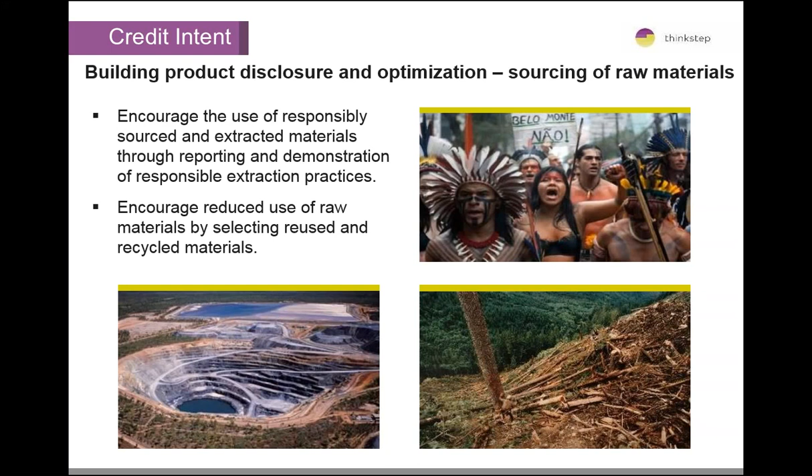So now that we understand the intent, let's get into the nitty-gritty of the documentation. There are 2 points to the sourcing of raw materials credit. And depending on what type of product you manufacture, you may be eligible to contribute to one or both credits.

The first option is a reporting credit, and that applies to all building product manufacturers. This option rewards project teams for sourcing at least 20 products from suppliers that publish corporate sustainability reports. The U.S. Green Building Council accepts a number of different frameworks for these reports, and they mention a whole list, but the most common of which is the Global Reporting Initiative, or GRI.

Option 2 is not about reporting, it's about performance, and it applies to manufacturers of bio-based products, whether wood or non-wood. It applies to manufacturers of products that contain recycled content, and to companies that offer take-back programs.

So first we'll dig into option 1 and the details and documentation required there. Project teams are asked to specify products from manufacturers that can provide reports of raw materials from their suppliers. So that means a sustainability report from the product manufacturer, but also evidence that its suppliers also publish corporate sustainability reports. So you can look at this in 2 tiers.

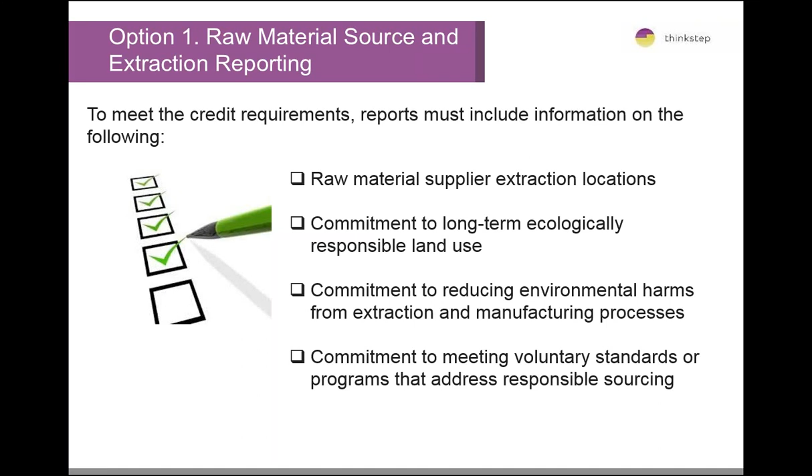So the emphasis here is for manufacturers of building products to engage with your supply chain. It's not enough just to report on your own practices. And the credit also incentivizes third-party verification.

I'd mentioned earlier that project teams need to source 20 products that publish reports. A self-declared corporate sustainability report would only count at half value. So to get that full value of a full product, it would be important to get that third-party certification.

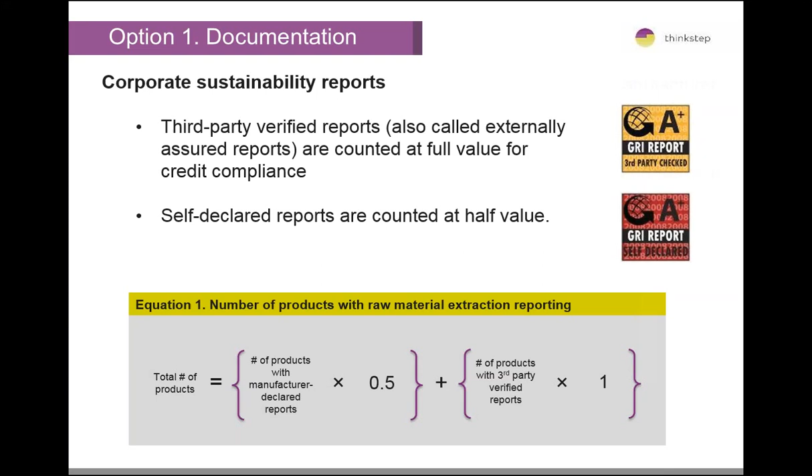I have an example here that maybe shows how it doesn't have to be terribly daunting. I worked on this project with a product manufacturer to conduct a gap assessment on what it would take to meet this credit. It turned out that this product manufacturer had a significant market in the UK.

And in the UK, responsible sourcing had been part of the definition of green building for some time. This manufacturer was already certified to the BRE 6001 standard, which already asks for extraction locations. So the gap for this manufacturer was to then include this information in their GRI report. They already had the data, they just had to publish it.

And then what about the supply chain engagement aspect? Well, the manufacturer was already engaging its suppliers with other types of questions related to health and safety and environmental management systems. So they just needed to add these 3 questions related to these commitments to its existing supplier questionnaire. So in this particular manufacturer's case, the gap to meet the credit requirements was easily filled.

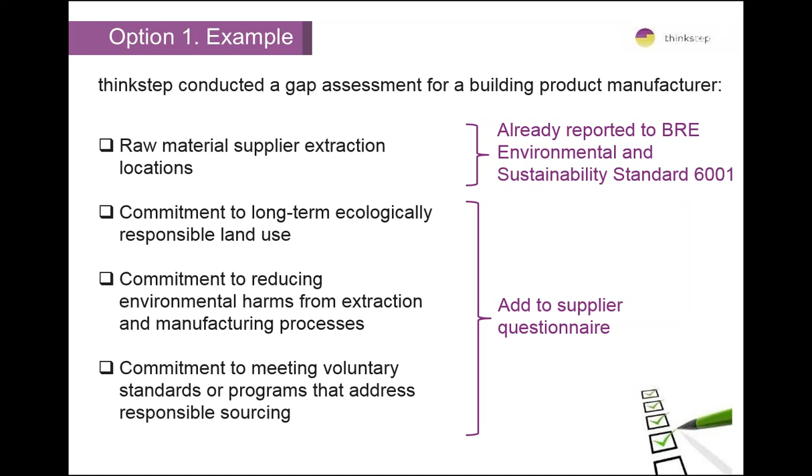I hope that makes it sound not as daunting then. Let's dig into the next option, option 2, which is about practices rather than reporting.

So project teams are encouraged to source products that meet at least one of the following responsible extraction criteria: extended producer responsibility and bio-based certifications, whether FSC certified for wood or for non-wood products, certification that the product was grown on a farm that meets the sustainable agriculture standard.

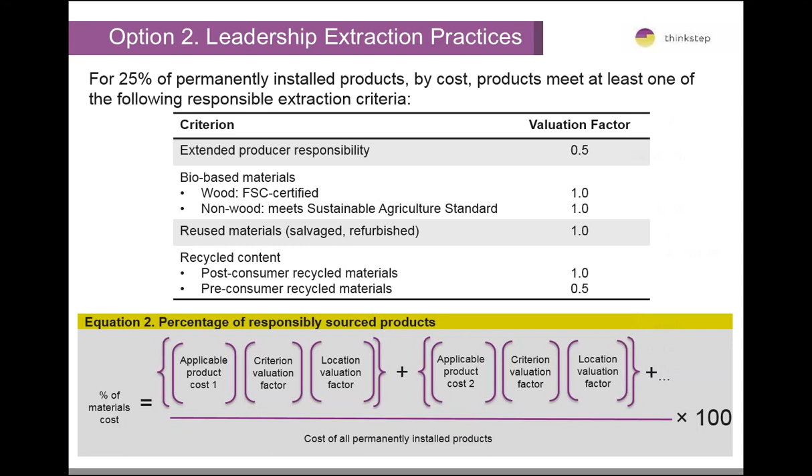Now, there is also a difference in what's considered local. In LEED 2009, 500 miles was the definition of a local product. This radius requirement has been decreased to 100 miles, and it's important that all extraction, manufacture, and purchase, including the distribution of the product and its materials, must occur within that radius. So it's a much stricter definition of local.

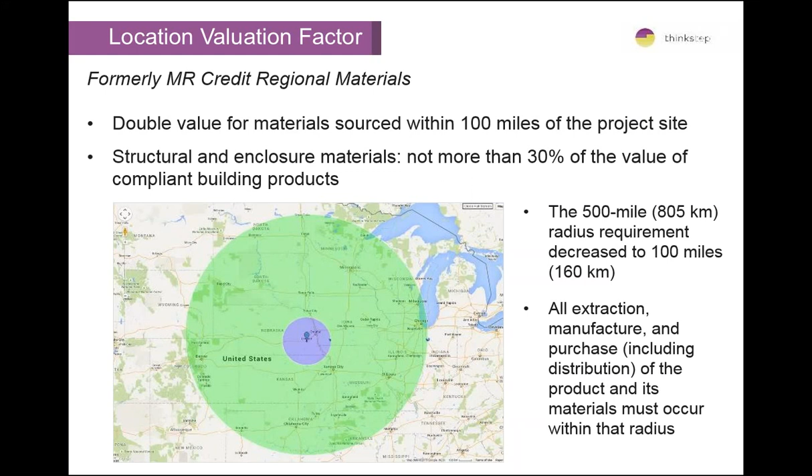In terms of documentation of recycled content, it's important to distinguish between post-consumer and pre-consumer recycled content. That's another difference between LEED 2009 and LEED v4.

So to summarize, the MR credit on raw materials encourages project teams to go beyond single attribute thinking, such as recycled content, and to make more intentional decisions based on better, more complete information about the human health and environmental attributes across the material's life cycle. It also recognizes that life cycle assessment, which we'll cover in greater detail in another webinar in this series, doesn't provide the full picture. So what USGBC is trying to do is allow for other types of information and documentation to fill those gaps.

So now I'm going to hand it over to Rick to explain what you can do once you have all your documentation put together.